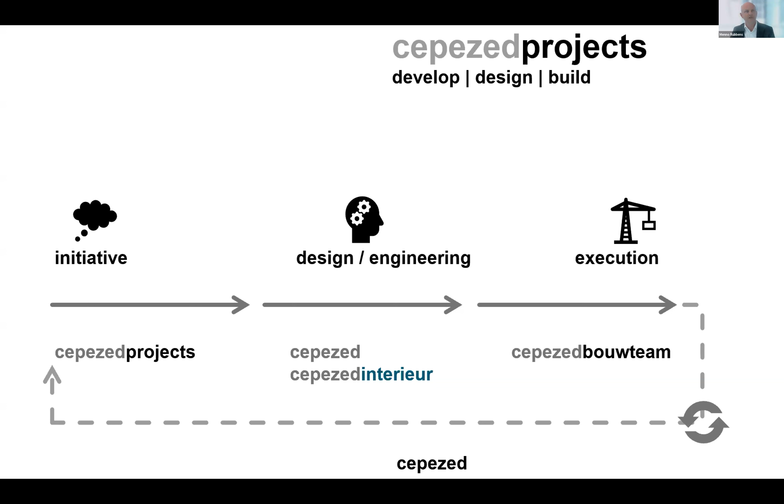cepezed projects is the development branch of the cepezed Group. cepezed Group is an ecosystem that brings together design, engineering, and execution under one roof. We work shoulder to shoulder with our sister disciplines, cepezed Architects, Interior, and the Building Management branch. Together, we form one integrated interdisciplinary team. And we like to say from idea to realization and beyond. Because we don't just deliver buildings, we deliver systems that perform, evolve, and endure.

But we don't stop there. We actively seek long-term partnerships across the chain, from demolition and material experts to contractors and system integrators. These aren't ad hoc collaborations, they're deliberate structural alliances, crafted to share knowledge, align incentives, and accelerate innovation. And why do we do that? It's because we believe this is the only way to deliver what we truly need today: smart, adaptive, and circular buildings. Let me show you what this looks like in practice with some of our projects.

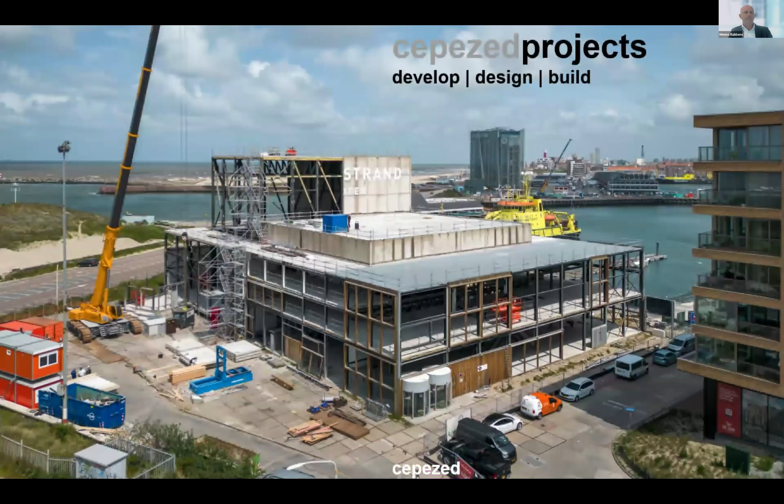We developed the temporary courthouse in Amsterdam, a fully demountable high-grade building. I'll come back to that a little bit later in more detail. We also created the greenhouse in Utrecht. It's a circular energy neutral restaurant designed to be completely disassembled and rebuilt elsewhere. And also we're redeveloping a theater in Oss. That's a city in the south of the Netherlands. And we use harvested materials that came from this theater in Scheveningen in The Hague to transform it into a vibrant, multifunctional complex, breathing new life into the existing components.

And we deliver modular laboratories and flexible office hubs tailored to ever evolving user needs. It's like Lego for grown-ups. In every case, we ask, how can this building serve today without limiting tomorrow? Because we don't just design for use, we design for reuse. And why does this matter? What is the urgency of it?

Well, let's talk about the elephant in the room, the CO2 emissions. The construction sector is responsible for nearly 40% of the global CO2 emissions. That includes everything, the extraction of raw materials, production of building components, transporting, logistics, construction activities, everything, and especially also the decades of operational energy use of the buildings. And that's a staggering figure, and it means that if we are serious about achieving the Paris Climate Agreement, we cannot delay. We must radically rethink how we build, and we must do it right now.

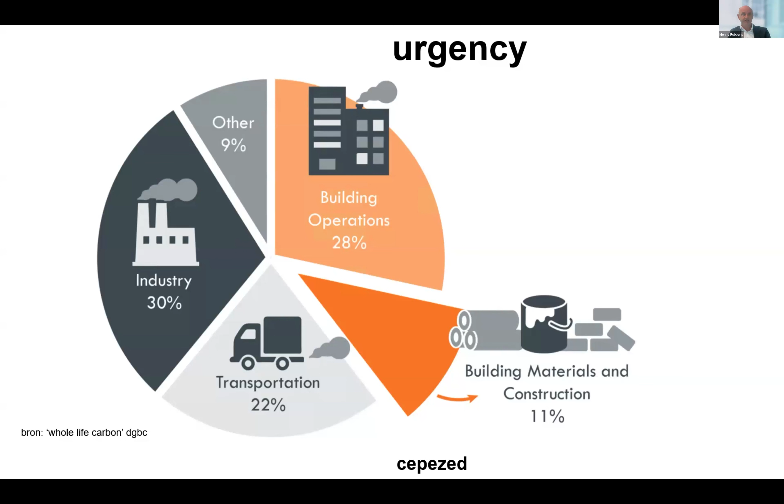Circular construction for us is not a niche. It's not an experiment. It's not a buzzword. It's an urgent necessity, and we're already doing it now. At cepezed, we're driven by two sources of inspiration. The first one is this definition of sustainability by the Brundtland Commission. It's meeting the needs of the present without compromising the ability of future generations to meet their own needs. And this sentence should be engraved in the minds of everyone who shapes the built environment.

The second inspiration comes from Stewart Brand, author of the book How Buildings Learn. You see the cover of it on your screen. And he offers a compelling critique of how some buildings are successful while other buildings fail. He has three key ideas that guide our thinking on a large scale. The first one is that all buildings are predictions, and all predictions tend to be wrong. This reminds us to embrace uncertainty and not fight the uncertainty. We can't predict the future as humans, so we must design for the change.

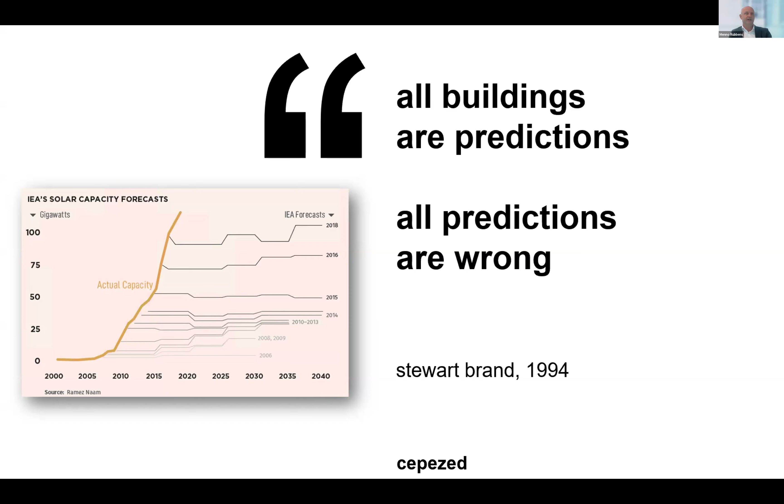And this graph of predicted versus actual installed solar panels shows you just how wrong even experts can be in their forecasts. So let's build structures that are flexible by design, not locked into rigid scenarios. And most buildings, he says, are also prematurely complex, which blocks adaptability.

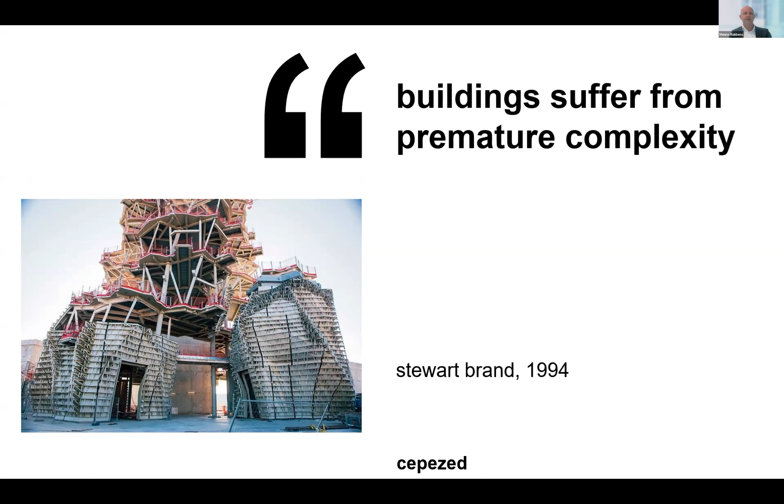We often should start with a simpler structure that enables complexity to emerge over time. And also, what he says is that buildings are made out of layers, and those layers have different lifespans. So mixing them up is a recipe for waste. Separating them makes change easy.

Think of it like a sandwich. If every layer of a sandwich is glued together, you cannot swap the lettuce without throwing the whole thing out. The same applies to facades, to interiors, to surfaces, to structures. Keep them distinct, keep them accessible.

And at cepezed projects, we've translated these insights into a concrete approach. We call it making buildings that are circular ready, a circular ready construction. We don't claim to have all the answers about the future circular economy, but that is exactly why we design our buildings to be ready for it. And the kit of parts thinking that we use is at the heart of this method.

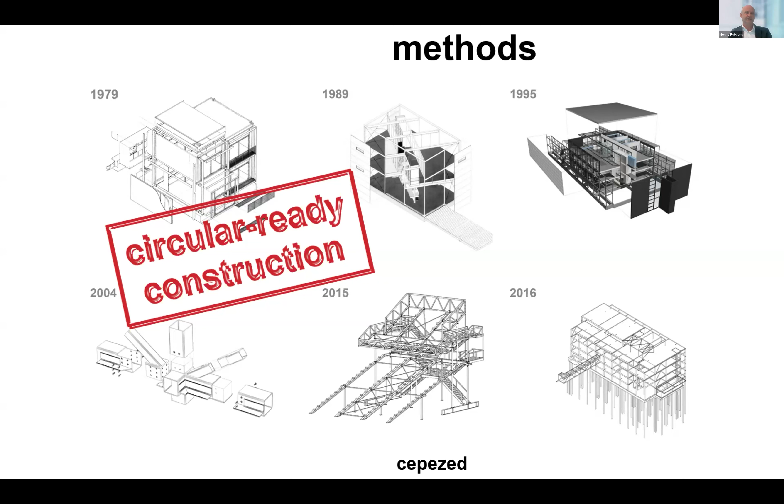Each building is assembled from standardized demountable components. That means they can be taken apart, can be moved, can be reused, can be reconfigured, and can even be completely reimagined and replaced and moved. The benefits are enormous. We can reduce the use of raw materials. We can cut down construction time, and most importantly, with this method, we eliminate waste, because in a circular economy, waste is a design failure.

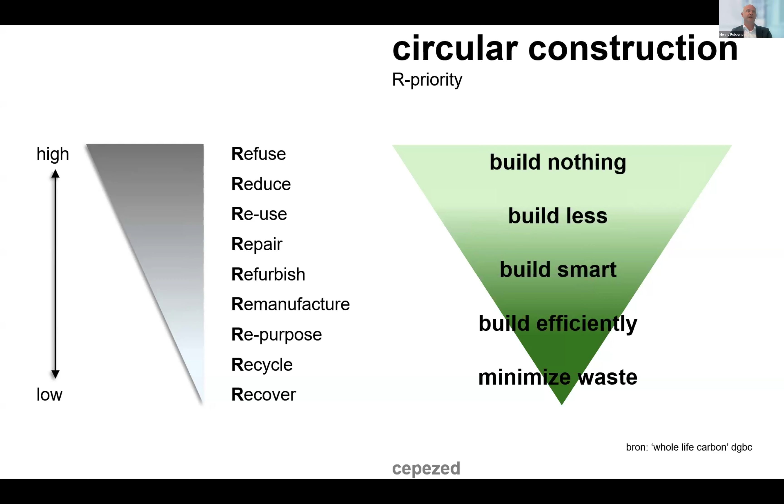Recycling is merely damage control, and burning material is a desperate last resort. So our goal is to make waste obsolete, and we aim for total reuse, not just in materials, but also in function and in form. Let me take you back to the temporary courthouse that I talked about earlier in Amsterdam. This was not a shipping container or a pop-up shed. It was a fully functional, high-quality building used for 7 years by the judiciary.

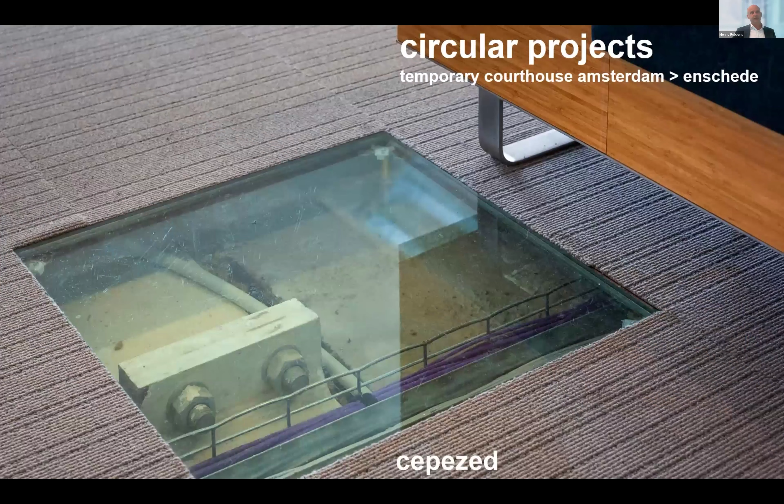And from day one, we designed it with the future use in mind. Can it later be an office? Can it be a school? Can it be apartments? All those functions should be possible in our view. The structure that we designed was modular. The services that are integrated are separable, and all the components were cataloged in the BIM model.

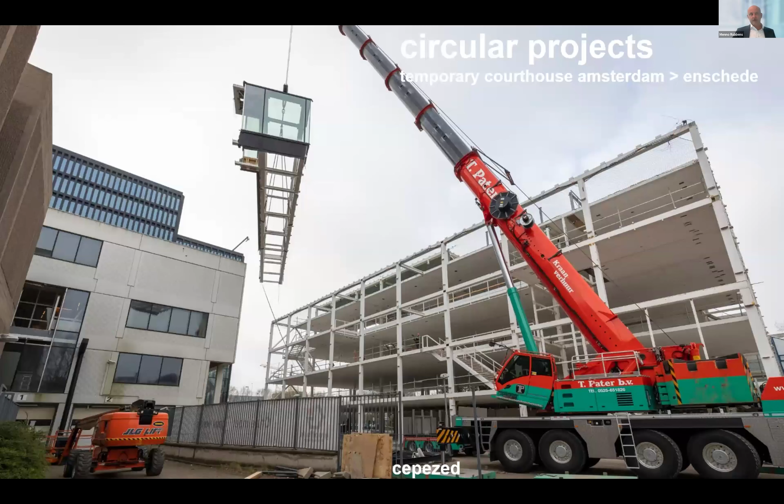And when the building was no longer needed on that site, what did we do? Well, we took it down piece by piece with care, with precision. And here's the best part: 90% of the building's CO2 footprint, embodied carbon, was directly reused on the new site. So there's no offset, there's nothing recycled, it's all reused. And here you see the materials on the new location.

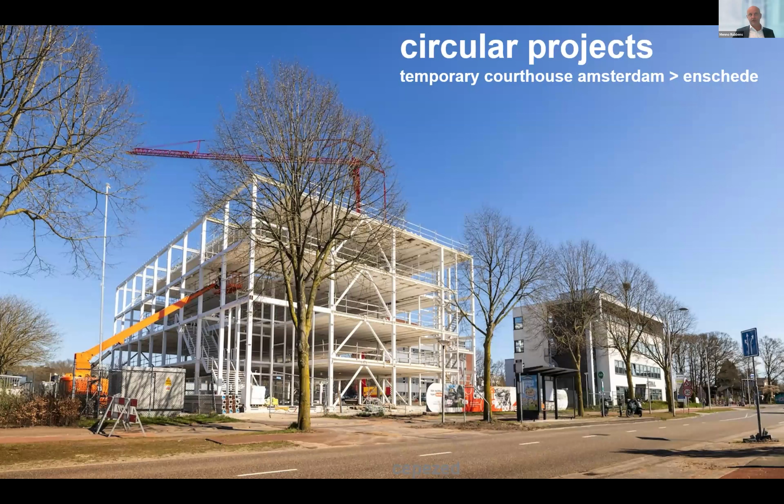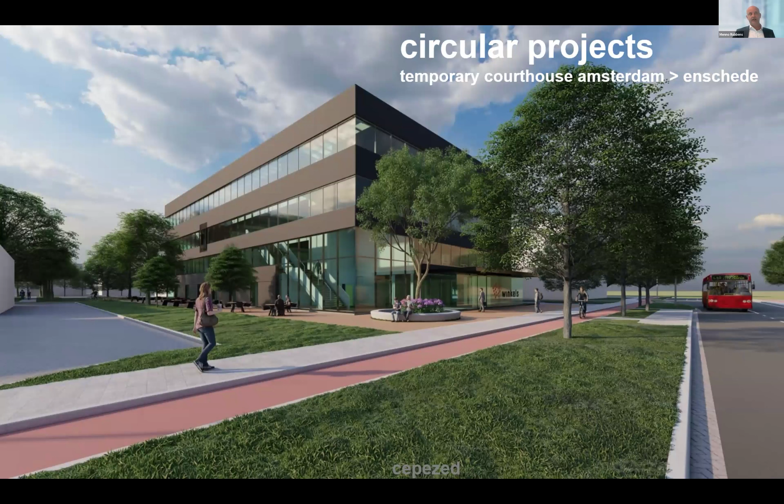And today that same building is being reassembled as a hybrid office and an educational center. The same parts, but on a new location and with a new life and without any waste. And this is proof that this approach works. It's scalable, it's repeatable, it's commercially viable, and it's already happening. And let me leave you with a few key messages.

The construction sector holds a massive lever in the climate transition, and we are part of the problem, but we can also be a very big part of the solution. At cepezed Projects, we use that lever to build a circular and adaptive future, project by project. And our kit of parts methods turns uncertainty into opportunities.

And we work in deep collaboration across the chain to bring this vision to life, together with contractors and demolition companies. And we're showing, not just telling, that a different way of building is not only possible, but it's preferable and it's commercially viable. The future is circular, if we choose to build it that way. And at cepezed Projects, that's a choice we have already made.

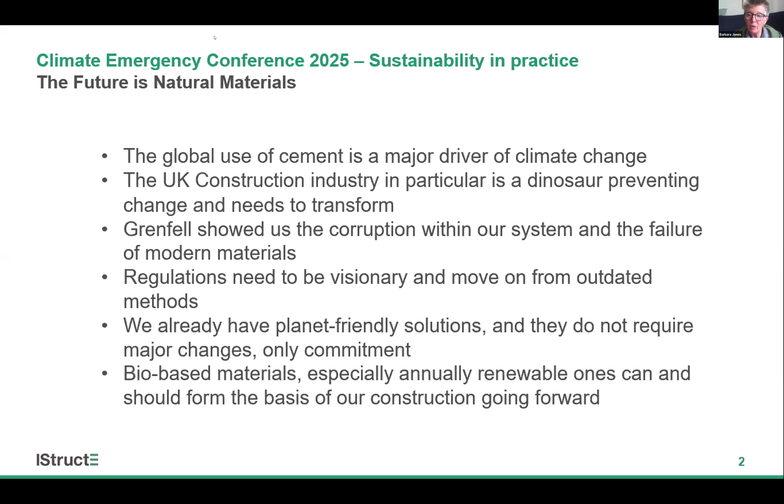We already have planet-friendly solutions and they do not require major changes, only commitment. And bio-based materials, especially annually renewable ones like straw and hemp, can and should form the basis of our construction going forward. So this is my premise for today. So to start with the past, we can learn a lot from the past. We don't have to always replicate it, but we can adapt what works.

And here we've got a very simple foundation with stone sitting on top of the earth. So no trenches, no need for cement, something that has lasted over 100 years already. We've also got something that at first sight might look like a failure, but actually, because it was made with lime and stone instead of cement and stone, it has lasted the test of time and it has actually become a tourist attraction.

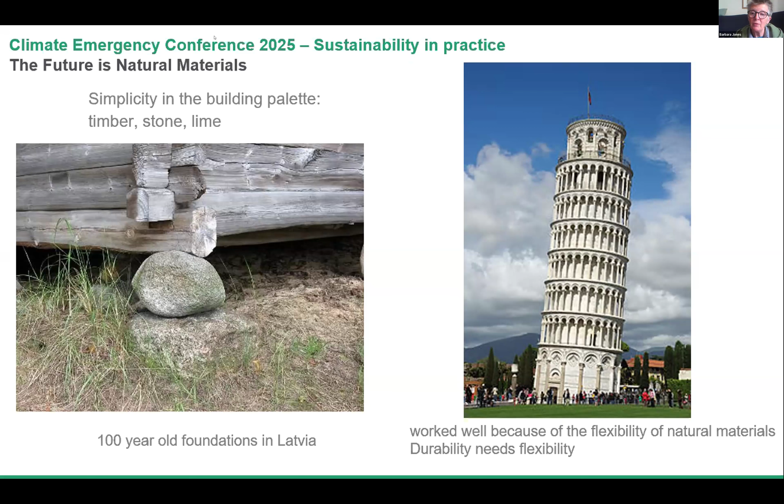So old buildings give us ideas for modern buildings. The ideas can be very simple, but that doesn't mean that there's something wrong with them. They could still work in the 21st century, and they can still work even if the ground conditions have not been fully understood, as in the right-hand case.

There are plenty of examples of cement-free designs available. I've specialised in them in my career of 45 years in construction, and a lot of these designs are freely available for you to copy and adapt for your own use. And a great way of combining natural materials with recycled materials is to make cement-free foundations using pillars of car tyres, which can be built very cost effectively.

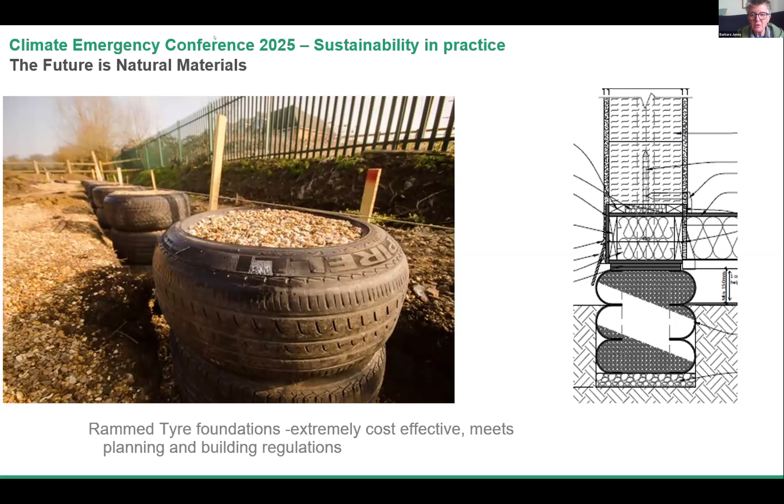And these have been passed by planners and by building regulations, so they've got full approval in the UK, and that has been in existence since 1996 when the first ones were passed. Another way of building foundations, well, this is the same way, using car tyre foundations. I want you to see that we're talking about real buildings.

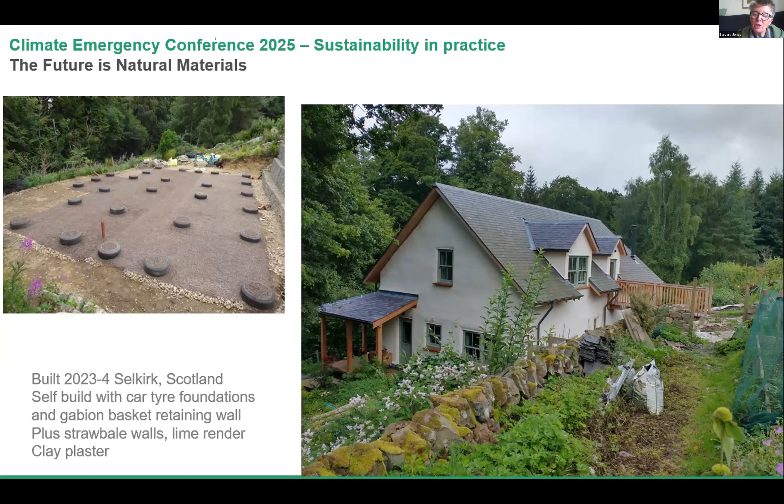On the other side of the scale, thinking about what Mano was talking about, here we have modular panels made in a factory, these ones in Slovakia or Lithuania. A factory will be coming to the UK shortly. And these are EcoCocon straw panels. They are 400 mil deep and they have a U value of 0.123 when they're fully fitted. They're a passive house certified system.

They're extremely simple to put together, so simple, in fact, that lots of self-builders are using them in the UK. And they're also very cost effective, because if they weren't, self-builders wouldn't be doing it. And they're more affordable than other SIP systems that are available, because they only have 4 layers, and because they're made of renewable materials. There is no other system that is as sustainable as straw.

88% of these panels is made of straw, and that can be grown each year without changing any agricultural practice, because in the UK we have 5 million tonnes of straw surplus to requirements every year. We can build everything we want and more with that amount of straw.

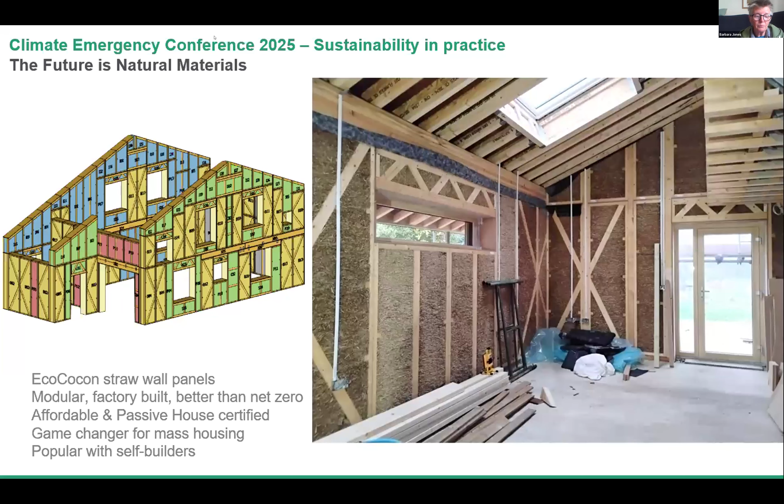In Sweden, where they have a different way of understanding fire risk, they have built the Hyllie project, which is a 12-storey apartment block using EcoCocon straw panels for the external walls, and the structure is held by CLT panels in the middle with a concrete staircase. And you can see from the costs here that it saves an awful lot of money compared to other building types. We're not able to go this high in the UK. We can only go to 18 metres because of the lack of understanding about how these materials work in practice at the moment.

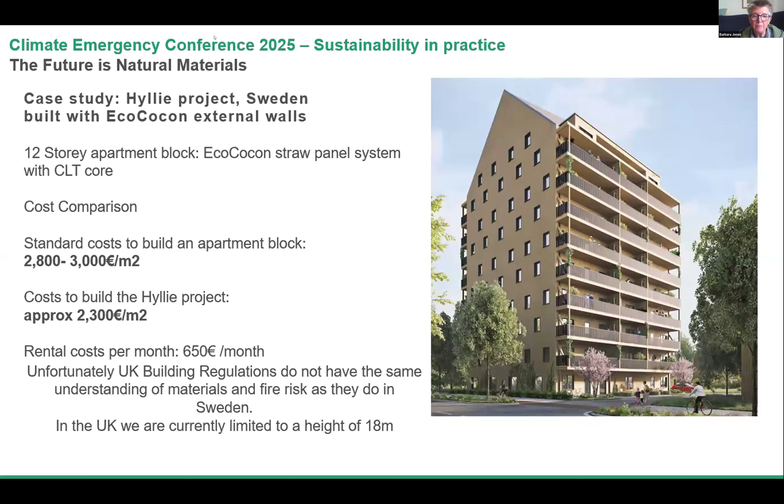Here we've just got a couple of examples of the EcoCocon straw house finished. Both of these are self-builds. They both meet all the regulations in England and in Scotland and Wales. And the right-hand one also has foundations with no cement in. This is what the foundation is like for the right-hand house.

It's actually a foamed glass geocell, chunks of hardcore, if you like, which has different purposes. So it acts as a hardcore, it acts as an insulation, and it acts as a capillary break, which is the old-fashioned way of preventing moisture movement upwards through a building. And it's based on the ideas of road building.

So when I first designed a building with this type of foundation, my ordinary engineer wasn't able to do it, and I had to transfer to an engineer who knew about road building. But to be quite honest, the road building ideas also go back to where we were at the beginning of this slideshow, which is they were following ideas that the Romans had put forward for taking roadways across marshes and ground with no good bearing on it. And so a lot of the ideas that I use are adaptations of the past.

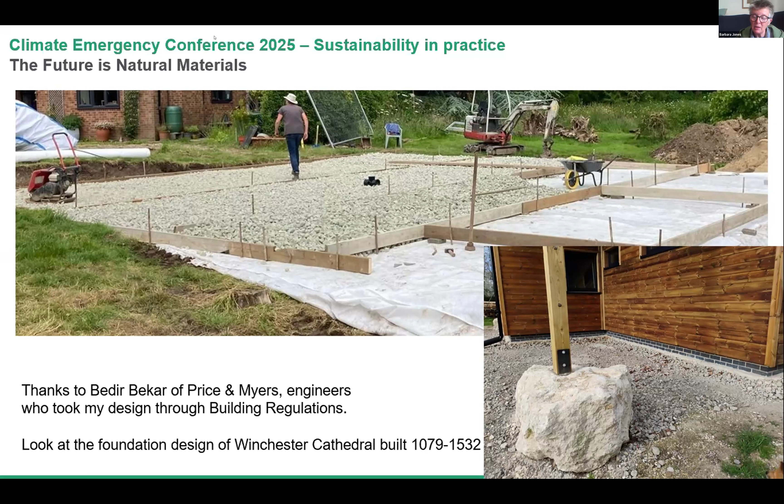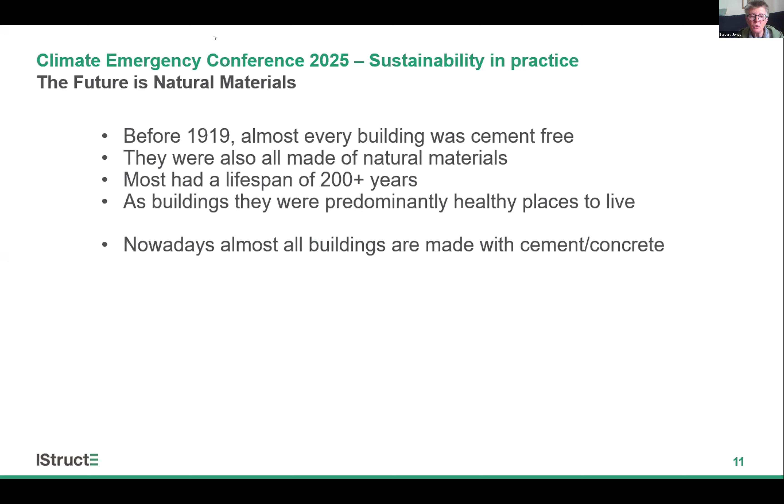So before 1919, almost every building was cement-free. They were also all made of natural materials. Most had a lifespan of 200 plus years, and as buildings, they were predominantly healthy places to live. Nowadays, almost all buildings are made with cement and concrete. They all contain toxic materials like PIR insulation and squirty stuff in tubes. Indoor air is full of pollutants from various different things.

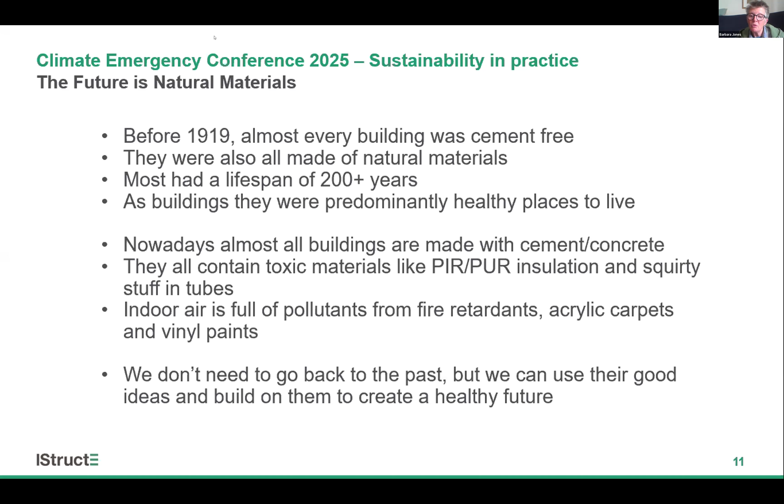We don't need to go back to the past, but we can use their good ideas and build on them to create a healthy future. And just by way of illustration of that, we've got the Sydney Opera House, a beautiful, iconic concrete building with a projected lifespan of 250 years.

We've also got the Pantheon in Rome, which is already over 2,000 years old. It's been neglected for huge amounts of time, and it potentially has thousands more years of life left, and it's built with stone and lime. It's something we really need to be thinking about if we're going to go forward.

So I'd reiterate what David said at the beginning. Don't be afraid to speak up and offer other material choices and design solutions throughout every building that you're working on. Thank you very much.

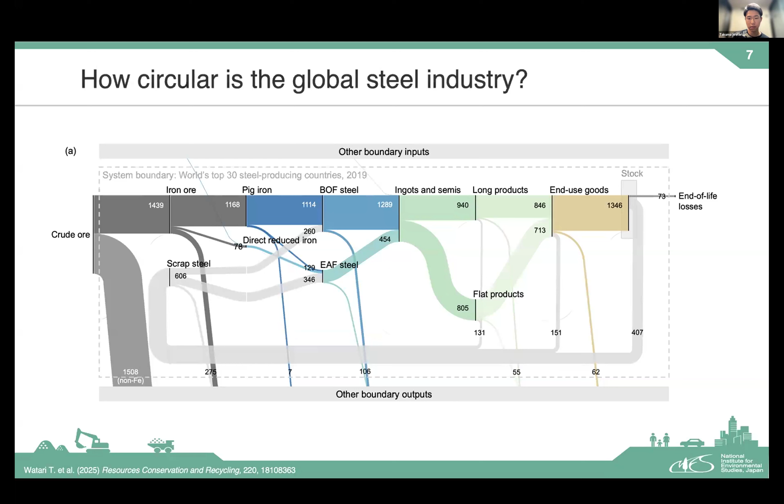So what we see in this diagram is the current global steel flows. So from the left, we have the iron ore extraction, which then moves through the stages of iron making, steel making, forming, fabrication, in-use stock, and waste management and recycling. So at the moment, the global steel industry requires about 1,800 megatons of iron input for steel making, and about 600 megatons of that comes from recycling. So this means the global recycled content in the steel making stage is about 33%.

So despite steel's inherent recyclability, since steel is magnetic and relatively easy to separate from the waste stream, and also the decades of industry's efforts, only 1/3 of the iron inputs currently come from recycling.

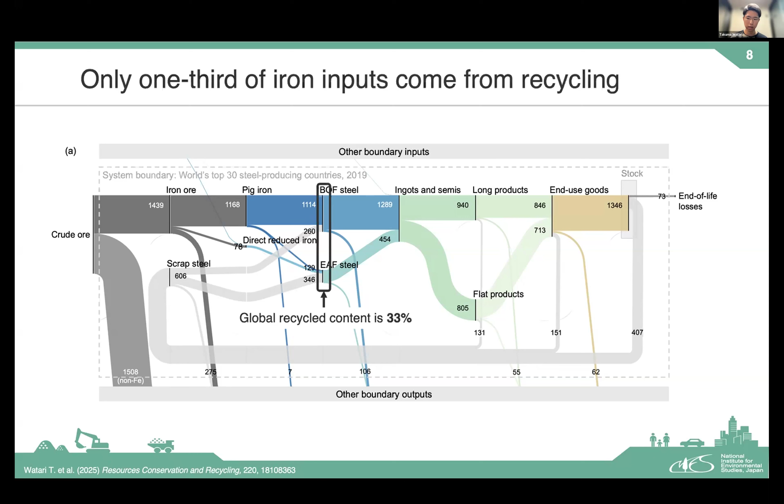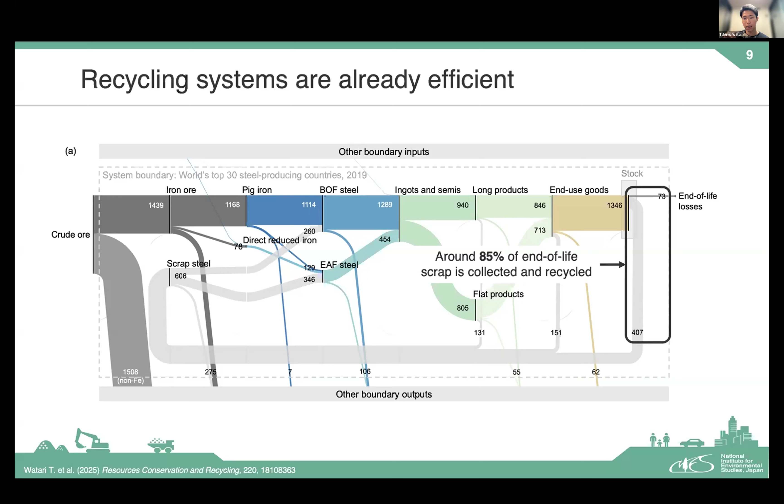And the important point here is that the limited recycled content is not because of poor waste management. In fact, what we can see on the right side of the figure is that more than 80% of end-of-life scrap is currently collected and recycled.

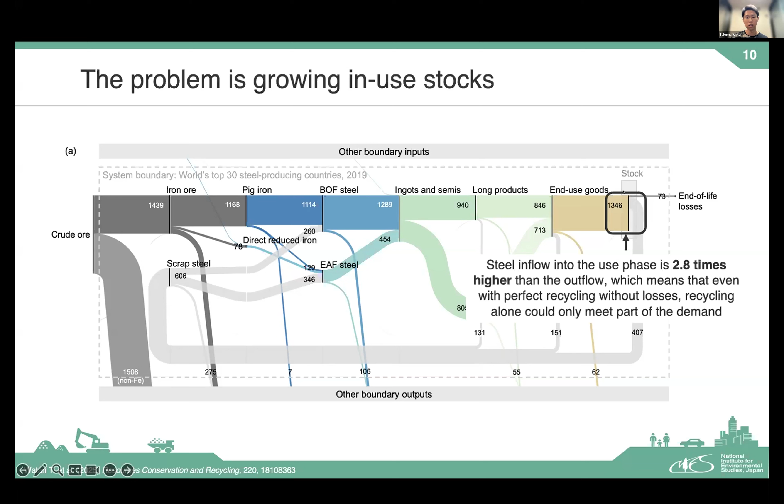But the real challenge is the growing in-use steel stock, which is still embodied in products, buildings, and infrastructure. So what we see on the right side of the figure is that steel inflow into the use phase is about 3 times higher than the outflow, which means even with perfect recycling, without any process losses, recycling alone could only meet part of the demand globally.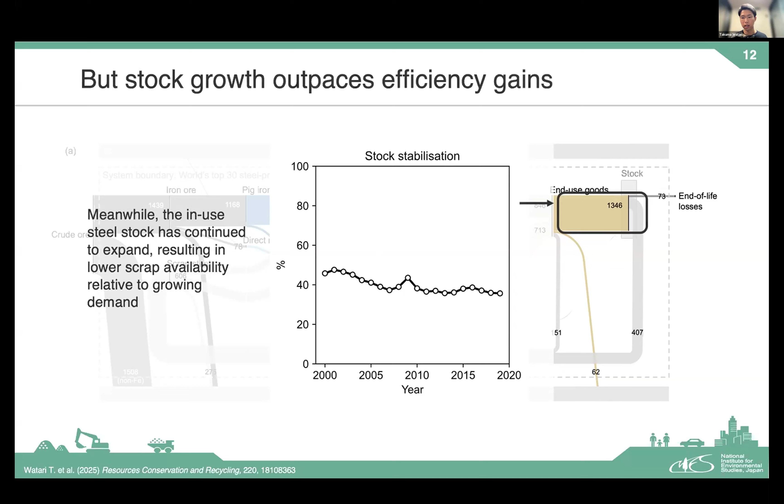And this sort of imbalance between inflows and outflow is not a short-term phenomenon, but actually part of a long-term trend. So what we see in this diagram is that over the past 2 decades, the global steel industry has made significant efforts to recycle more and more scrap, and the end-of-life recycling rate has improved from about 60% to more than 80%. But at the same time, the in-use steel stock has continued to expand, which means scrap availability relative to demand has been declining over the past 2 decades, from the year 2000 until 2020, as you can see here.

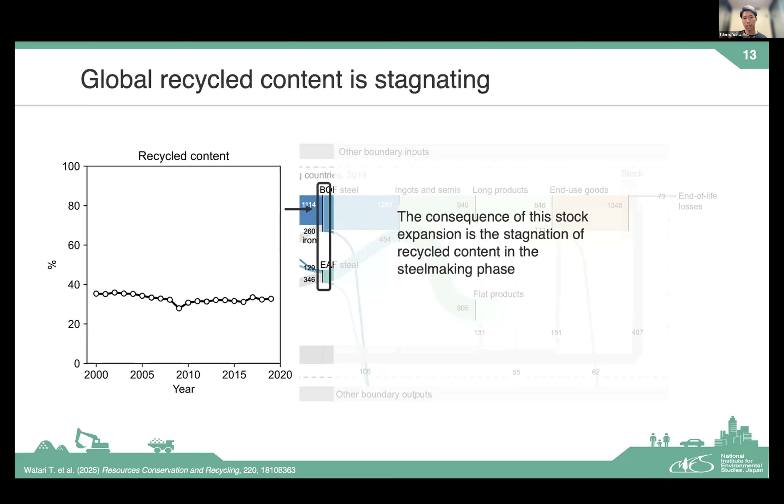And the consequence of this stock expansion is the stagnation of recycled content in the steelmaking stage. So what we see in this diagram is that the global recycled content in the steelmaking stage has stagnated at about 30% over the past 2 decades. So in that sense, the industry hasn't been able to close the loop because the in-use steel stock has been growing much, much faster than the improvement in the waste management stage or recycling efficiency.

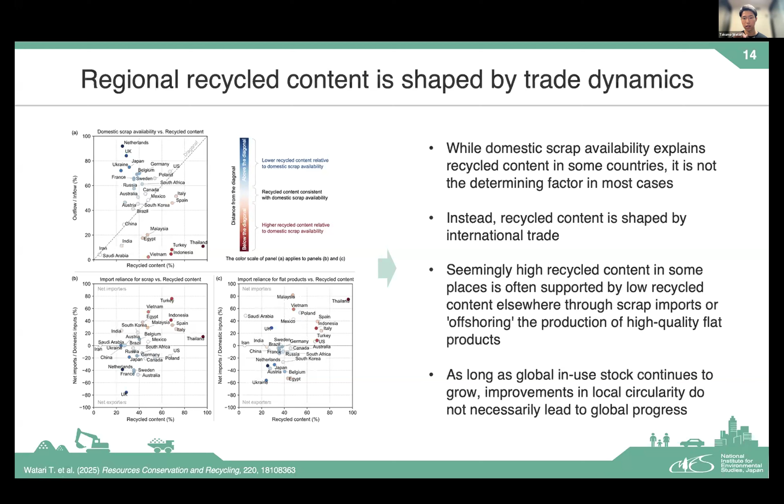And so seemingly high recycled content in some places is often supported by low recycled content elsewhere through scrap imports or offshoring the production of high quality flat products. So we conclude in the study that as long as the global in-use steel stock continues to grow, more recycling in some places does not necessarily lead to global progress. So clearly, recycling won't save us unless we stabilize the growth of in-use material stock. So that should be the priority. So that's my first argument.

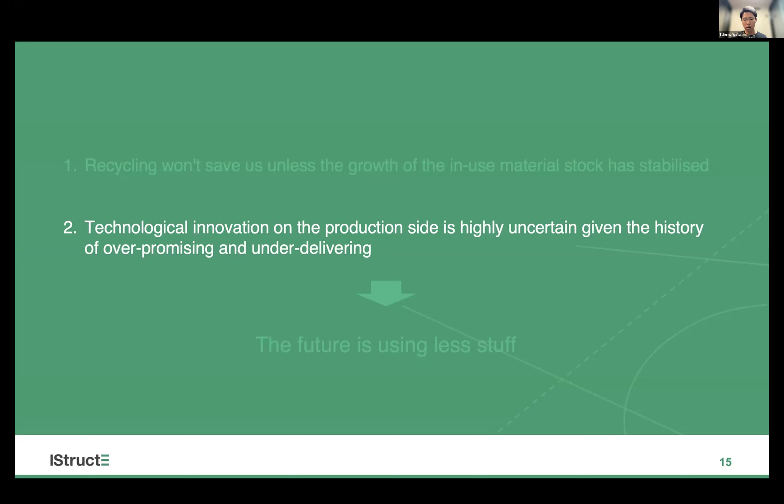Now I want to move on to the second part of my argument, because many are placing their hopes on technological innovation on the production side, such as carbon capture and storage or hydrogen. But the key question is whether these technologies can scale up fast enough. And unfortunately, our study indicates this is highly uncertain or highly unlikely. So let's look at cement as an example.

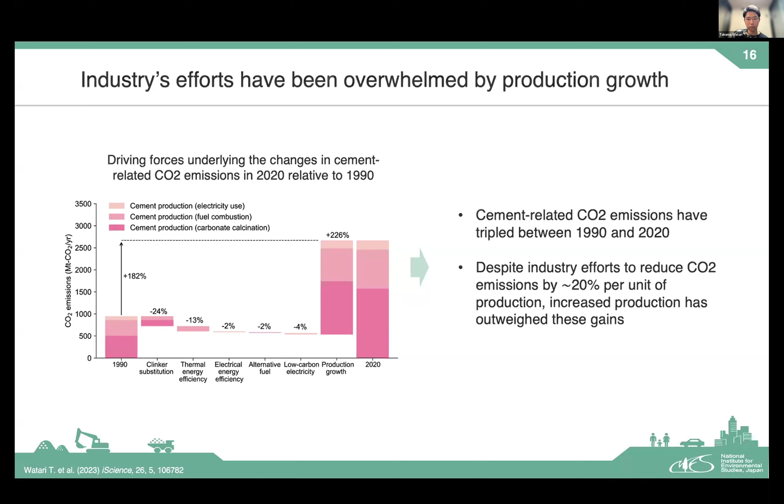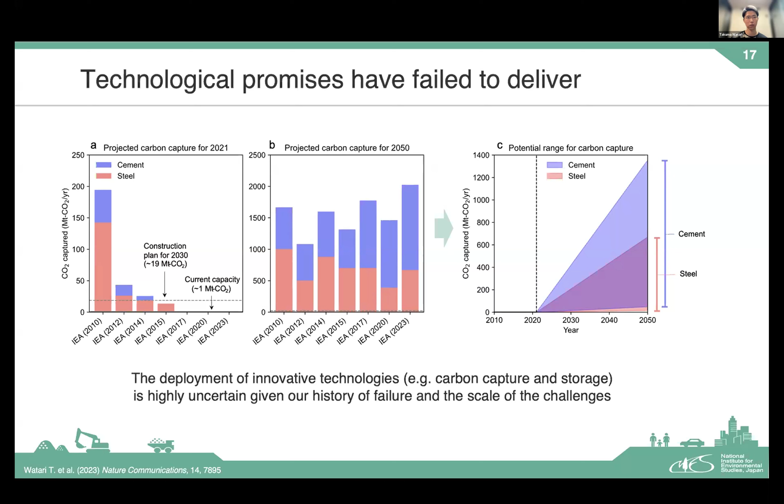And yet, if we look at the 2050 projections, we see the International Energy Agency almost constantly assumes about 2,000 megatons of CO2 will be captured in these sectors. And that would be a remarkable achievement if we could get there within 25 years. But given the scale of challenges and also our history of failure, the actual deployment is quite uncertain, if not highly unlikely. So based on all these data, we estimated how much material we could possibly produce within the finite global carbon budget.

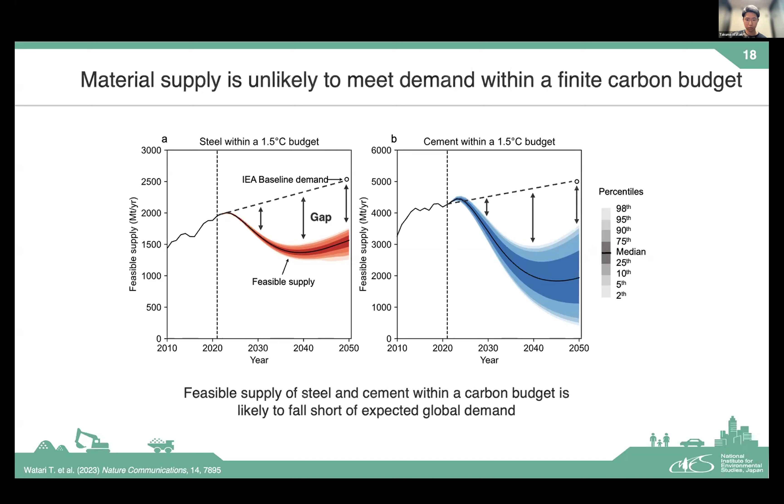So to summarize, recycling won't save us unless we stabilize the growth of in-use material stock, and technological innovation on the production side is highly uncertain given the history of overpromising and underdelivering. So the logical conclusion to me is we need to use less materials in construction.

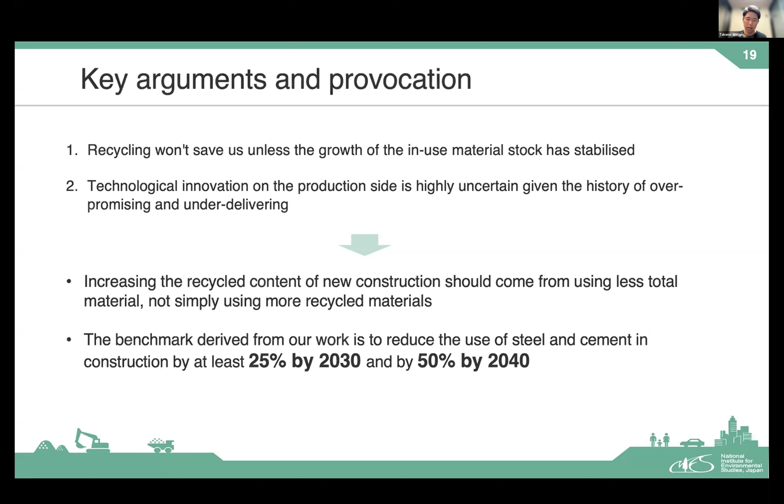I think many of you in this room have far more expertise than I do in this space, but I think what I can offer from a systems science or systems analysis perspective is that the benchmark we need to achieve is something like reducing the use of steel and cement in construction by at least 25% by 2030 and by 50% by 2040. So these are the minimum requirements that we as citizens in the global north must achieve in order to stay within the fair share of the global carbon budget based on our study.

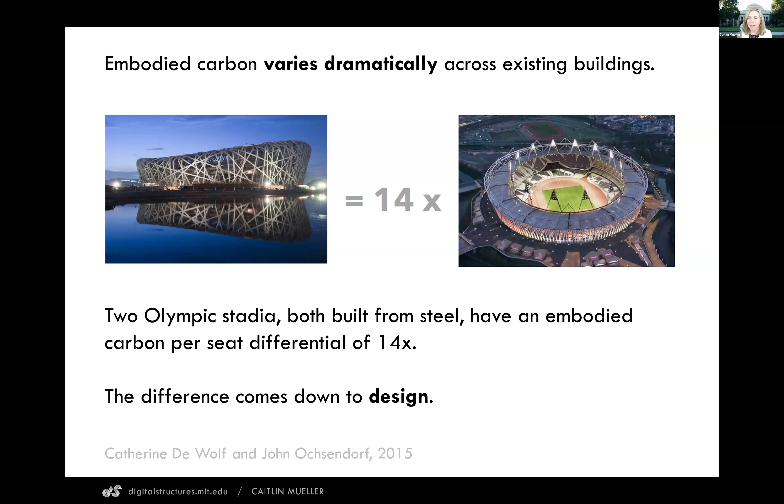They're both made of the same material. They're both made out of steel. So it's not just a question of material substitution here. Why is the embodied carbon so different? It really comes down to design.

And as we've collected more data about embodied carbon from practice around the world, this is recent data from the United States from the Carbon Leadership Forum, we continue to see this remarkable spread in embodied carbon. Here we're looking at several hundred buildings normalized by square meter across 3 different material systems. Again, we see a huge differential here of more than 8x. And it can't be explained by material alone. Again, my argument is this comes down to a question of design.

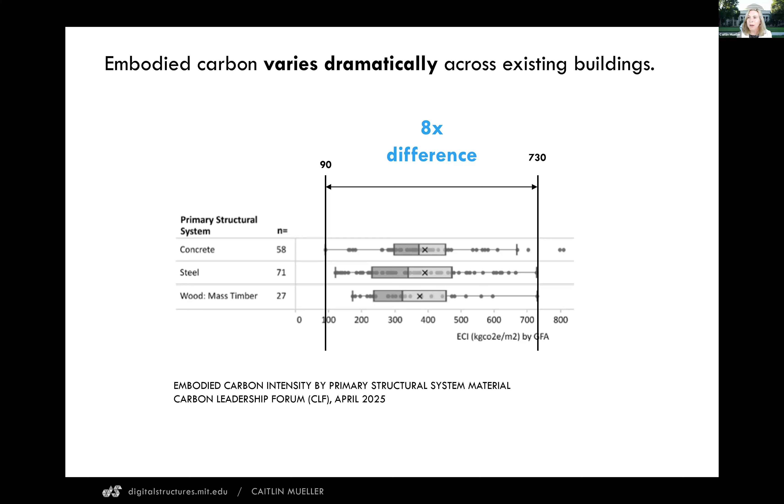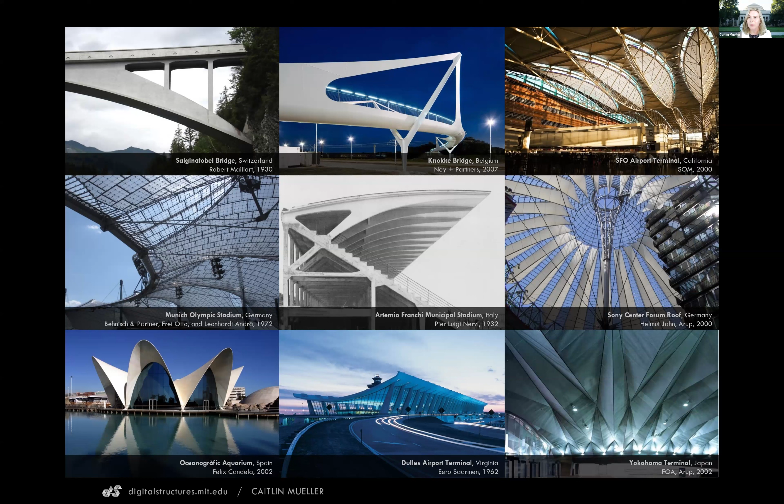We know this conceptually. The best structures from around the world and from throughout history use design explicitly to achieve remarkable forms, but also remarkable efficiency, lightweightness, use of material that is intelligent and driven by design. These structures are remarkable, but unfortunately, they're also fairly rare. We need to think more about how high performance design, which has so many benefits, can play a role not only in the construction of remarkable cultural and elite buildings, but throughout the architecture, engineering, and construction industry.

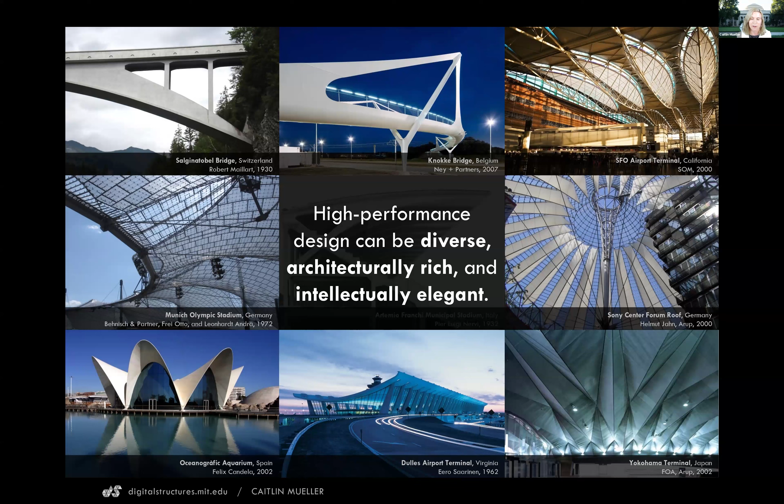In my work and in my research at MIT, we're promoting a way to do this through digital design, through using computation to allow us to flexibly and creatively and systematically explore large design spaces of possible solutions so that we can find potentially optimal solutions, but also balance performance with other really important goals driven by human expertise and ingenuity and creativity. We find when we model buildings at the full scale, we can start to find dramatic carbon reductions that, again, are not possible through material substitution alone.

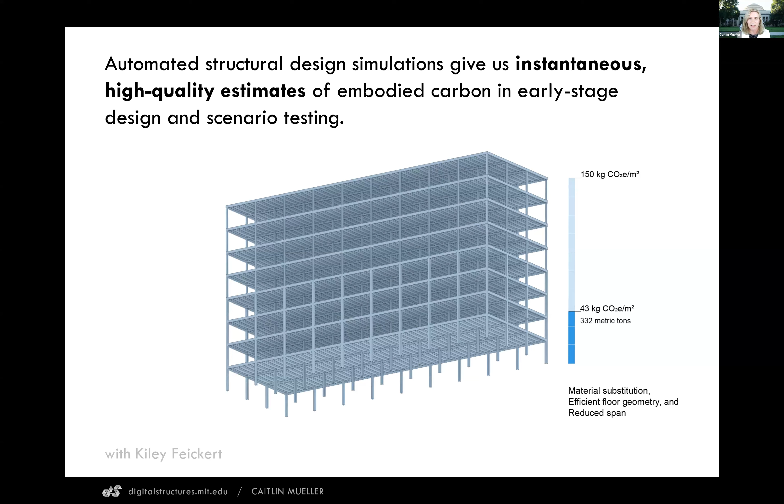We see that material substitution has a modest savings in terms of overall carbon intensity, but larger scale decisions like reducing the span of the columns, introducing smarter shaping of structural elements, reusing components, using all of these ideas together produces not only one solution, but many different high quality ways to reduce carbon that promotes innovation and creativity and allows us to find solutions within our local context. So I'm really inspired by seeing all of you doing this today. And I think this is absolutely the mentality that we need to take forward.

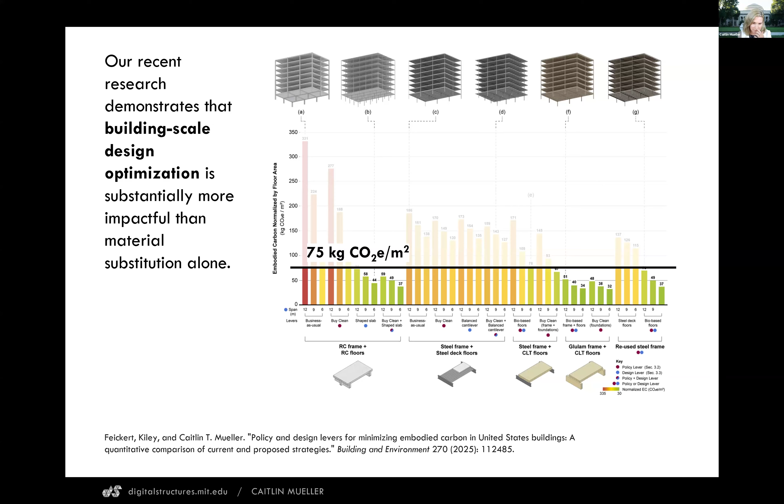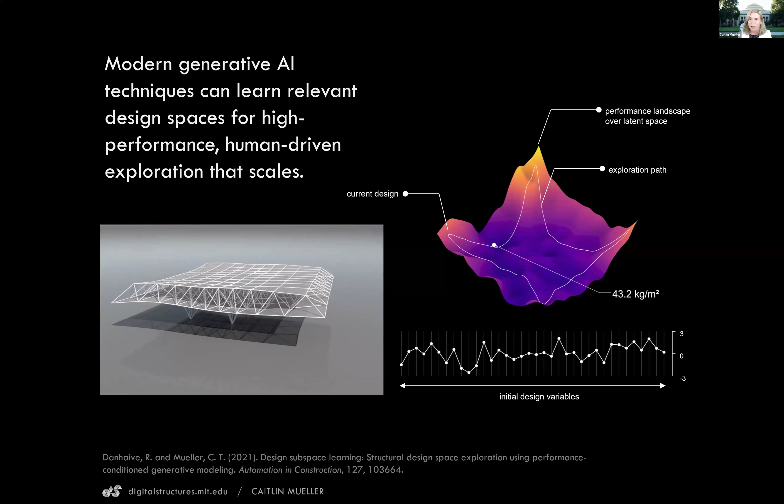How can computation help us do this further? I'll give a few examples of emerging tools and approaches that we're developing in our research and also some recent prototypes and projects. One way that we're thinking about how we can expand design space exploration is using generative AI to learn new design spaces. Really complex spaces of buildings that have hundreds or thousands of variables are practically impossible to explore with existing optimization tools. The problem space is just too big. But modern generative AI tools like this can learn a new latent space of high performance possibilities that start to make sense of really large scale data to help us discover new ideas.

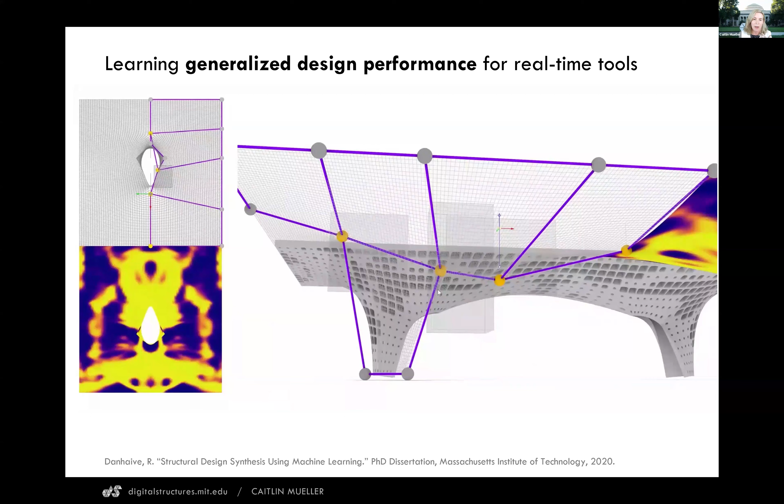So if I change the shape of the geometry, I can instantaneously see how a material should be optimally distributed, which changes these engineering techniques from things that can only be done once or twice to things that can happen in rapid, iterative, creative workflows that are collaboratively pursued by architects and engineers together.

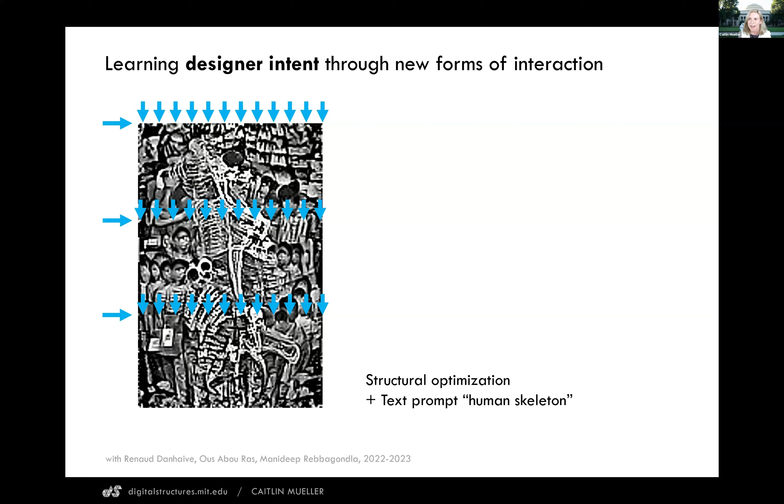We can also start looking at how new AI tools can collaborate or be compatible with engineering techniques like topology optimization. This is kind of a funny example, but here we're using a text prompt for a human skeleton combined with a topology optimization technique to find a sort of new form of skeleton for a building. And this is not necessarily immediately buildable.

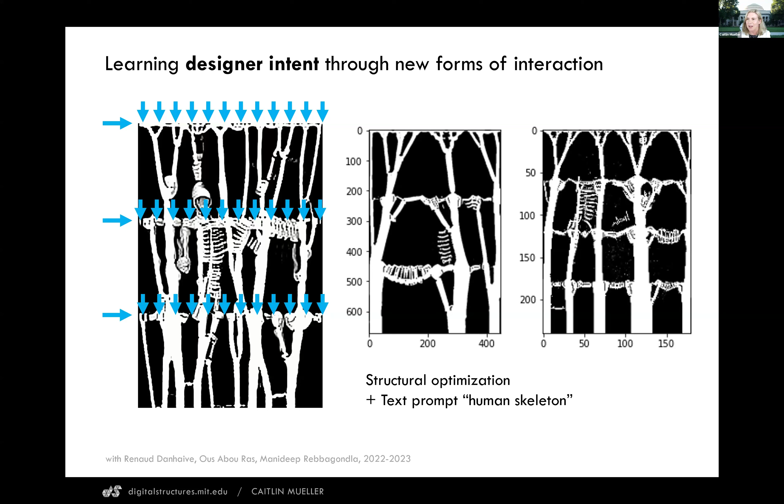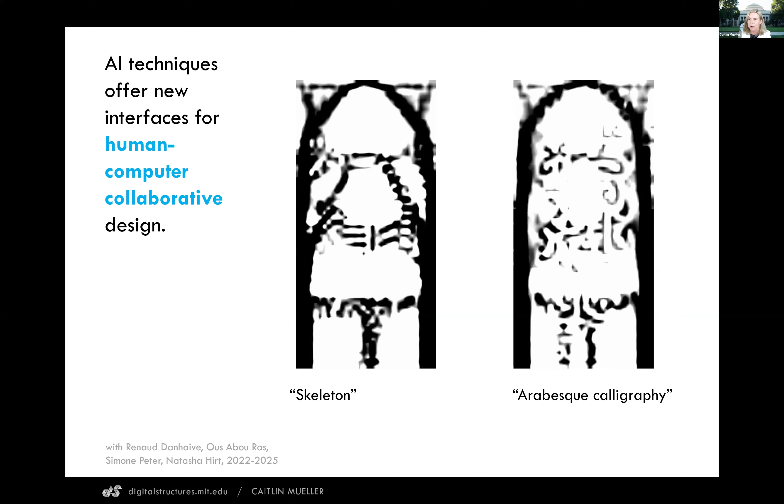There's some issues that come out in the results, but to us, it's this really interesting set of experiments that start to show how we can combine human intent, creativity, design impulses with performance-driven design to arrive at new types of solutions that start to connect poetic influences with rational form making.

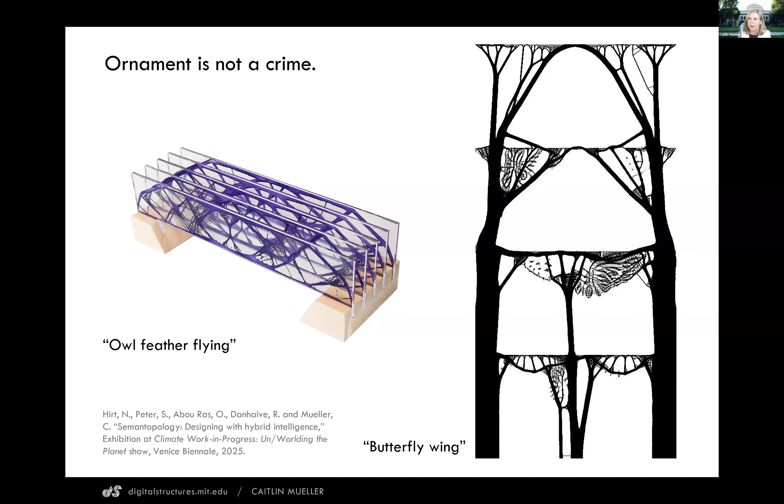It's interesting to look at some of these examples that start to look really naturalistic, and it starts to remind us that actually the natural world also offers a lot of opportunities for us directly to reduce carbon in structures. And indeed, people working with wood and trees have been doing this for centuries. For example, in historic shipbuilding, trees were used in a minimally processed way to find high performance structural pieces that meet the geometry of the trees where they are to find the shapes of the boats.

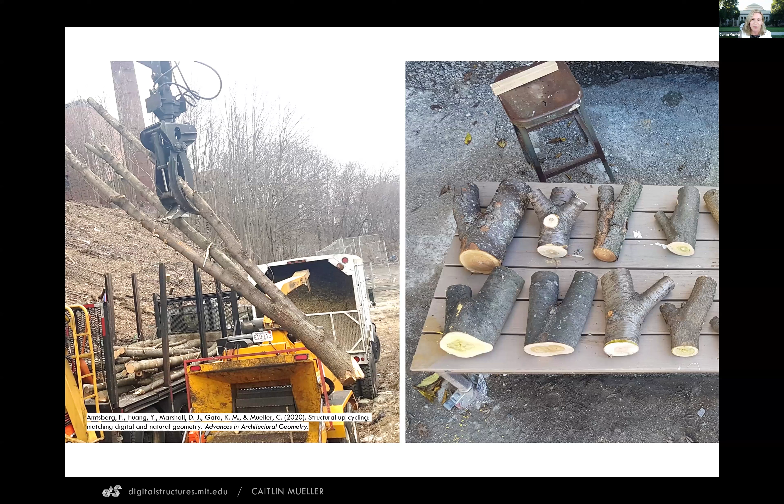We've been exploring a similar idea in our research where we're saving trees from being chipped and having all of their carbon released and identifying their joints as potential structural connections. We can use digital workflows that allow us to digitize this inventory of tree forks as structural connections and find design possibilities that make the best use of these materials.

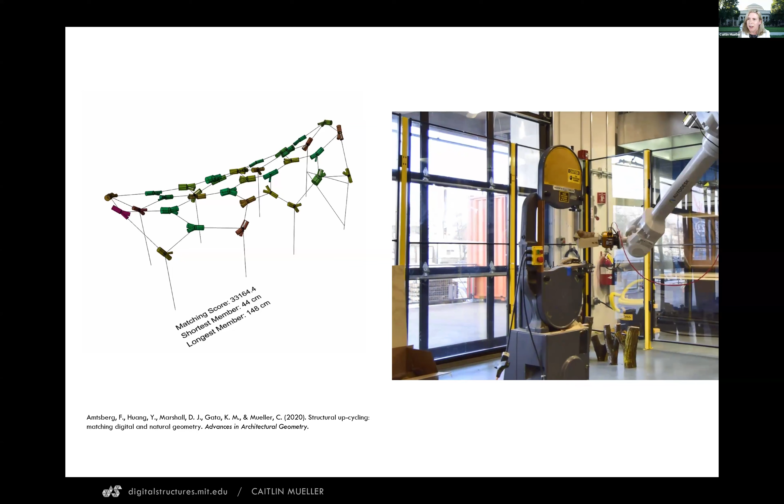So how should I change the design of this grid shell to better use the tree forks that I have available? And how can automation like robotic bark removal make this scalable so that even though each branch is unique, the toolpath automation happens in an automatic way, and so it's highly repetitive.

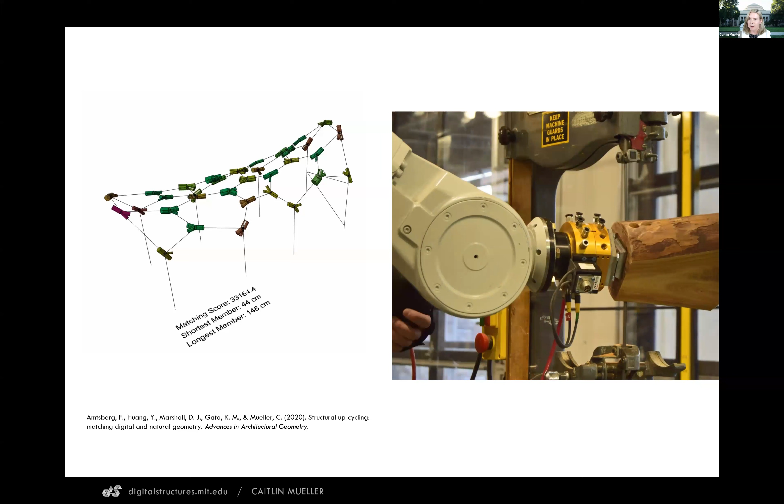We can also do this without robots. We can use emerging tools like augmented reality to use really traditional carpentry joinery techniques like scarf joints, but cut all the pieces informed with our digital tools.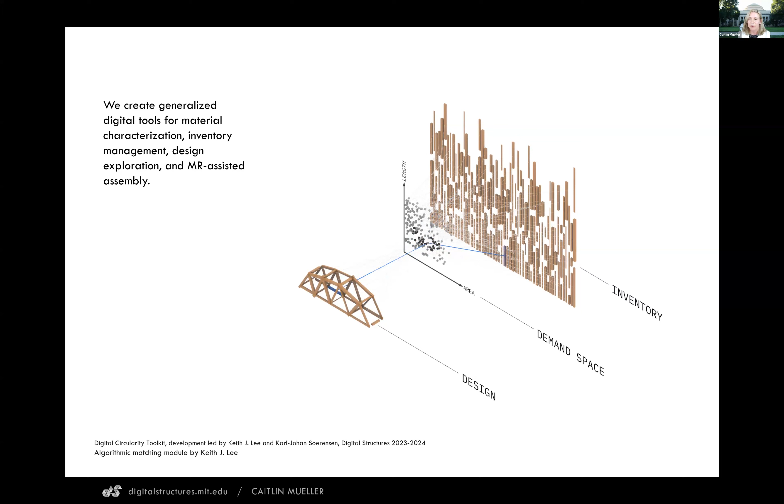This circularity idea is more general than just trees. We've had a kind of very general approach where we understand supply and demand in structural form making, where we can design structures to respond to an inventory of many different types of parts, of linear elements, of rubble, of offcuts. Here we're looking at how we could design a truss in response to an inventory with optimal matching that happens in real time thanks to really fast underlying algorithms.

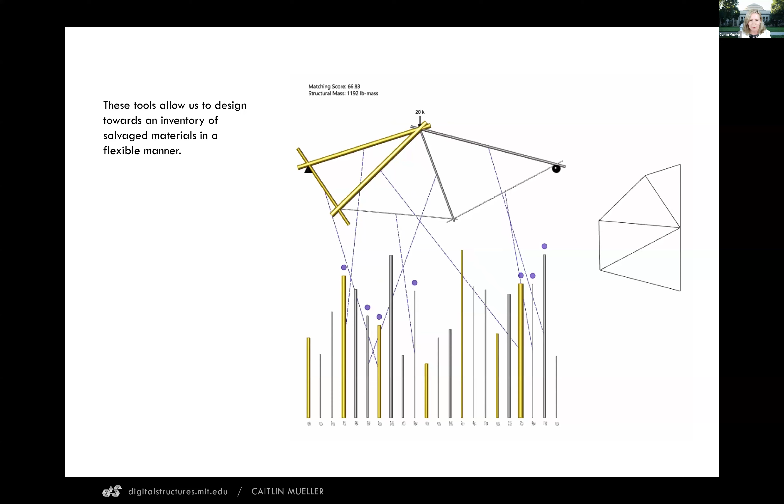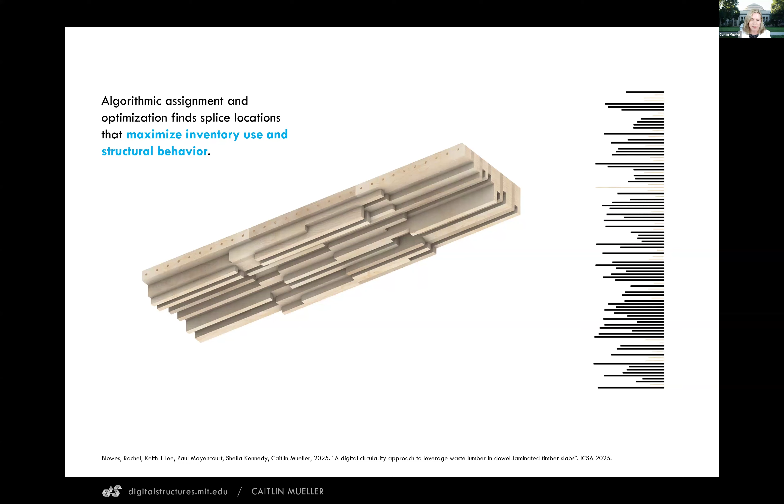We're applying these techniques to ideas like how can we use scraps of dimensional lumber to produce high performance structural components like dowel laminated timber floor slabs, which can automatically make use of a scanned inventory of scrap and use dowels to successfully load transfer if these scraps are organized in the right way to produce new shapes for buildings.

And finally, I also want to talk about concrete, as this came up quite a lot today. Concrete's a really important material in our history and likely also in our future, but we need to start using it in a dramatically different way. Of course, we need to use alternatives to cement, but we also just need to use a lot less of it. The great news about concrete, as I suggested earlier, it's very possible to do this.

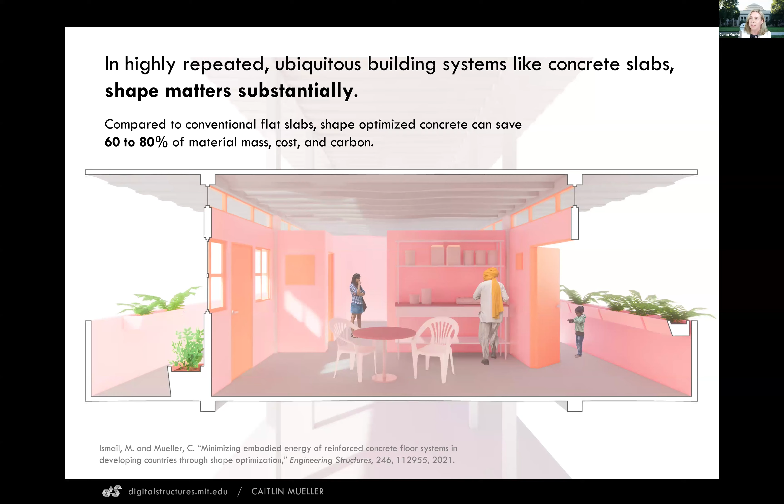Concrete is one of the easiest materials for us to sculpt and remove unnecessary material because it's cast, and it benefits tremendously from that process because it is so heavy. And so our process that we've developed uses shape optimization to find optimal configurations for ribbed structural systems that follow building codes that are based on today's knowledge, that use today's materials, but that can reduce carbon by 60 to 80%.

We're working on disseminating this in high impact applications like affordable housing in the global south. Here's a prototype that we built in Mexico with partners. My students who worked on this are commercializing this technology, this shape optimization technology, with a new startup called Forma.

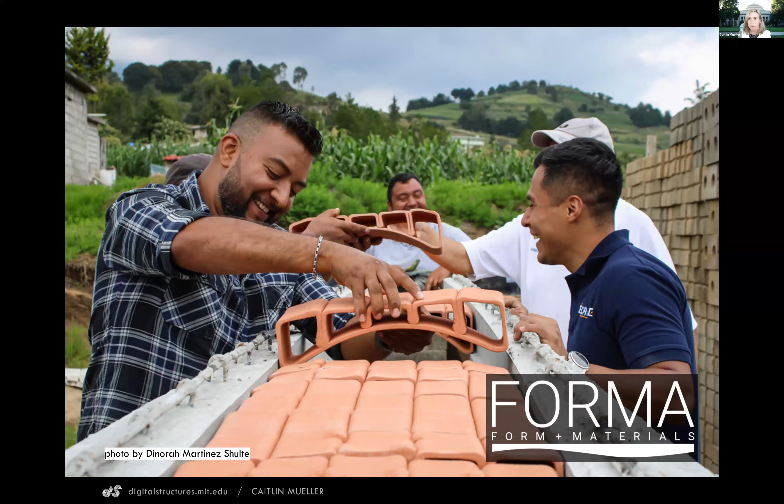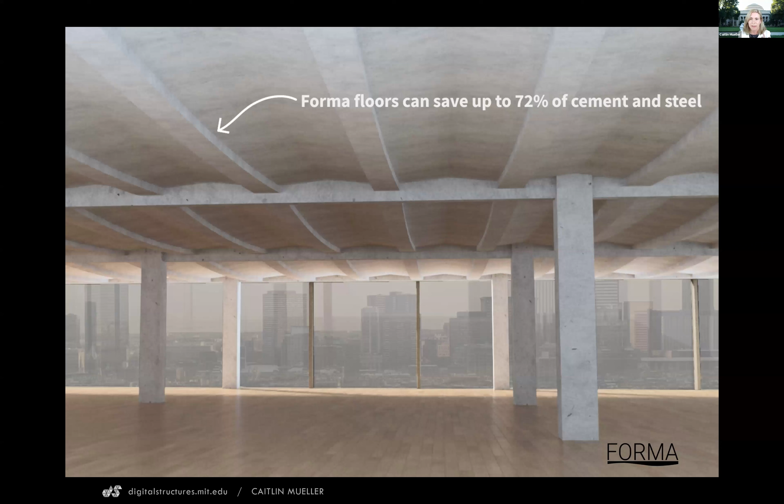They also use techniques like additive manufacturing of very low cost formwork to de-risk scaling up these new precast concrete techniques. And they're demonstrating the potential of reducing the concrete and the weight not only saves a lot in the floor slabs, but also has all of these downstream benefits, reducing carbon in beams and columns and foundations, all of which can become lighter.

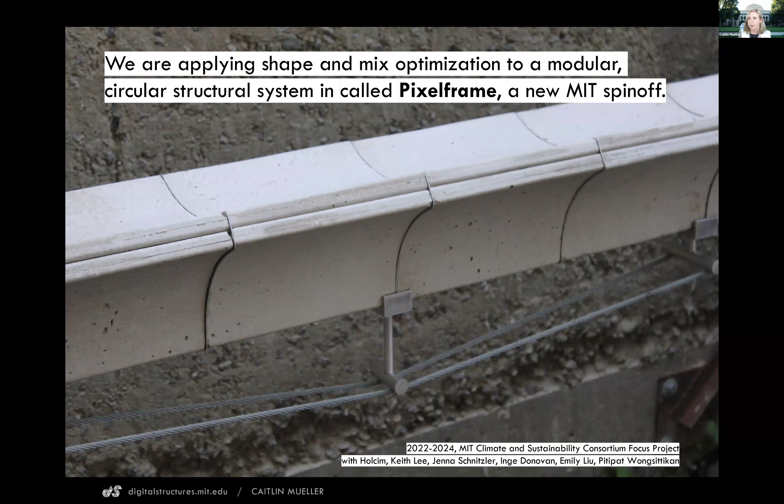The final project I'll show very briefly connects a lot of these ideas together into a product called Pixelframe, which is a precast modular circular concrete system that uses substantially less upfront carbon through intelligent shaping and is also fully circular and reconfigurable thanks to its modular design and a demountable post-tensioning system.

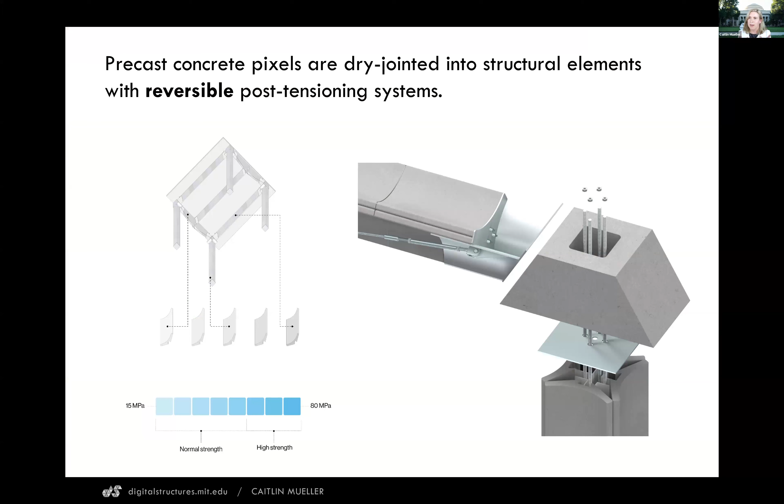The idea is there's one unit, the pixel, that's repeated in many different ways. Pixels can come in different strengths so that we're only allocating carbon and high cement content where it's necessary. And the pixels assemble to become beams, columns, and frames for buildings. The pixels themselves can be reused many times. The metal components can be recycled.

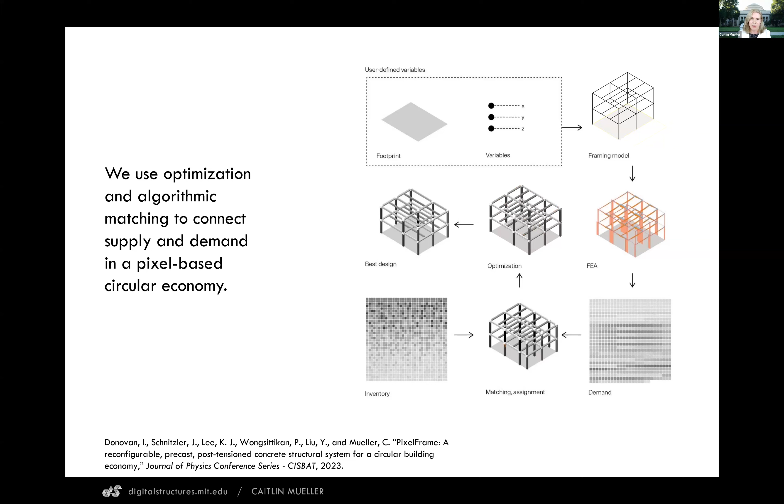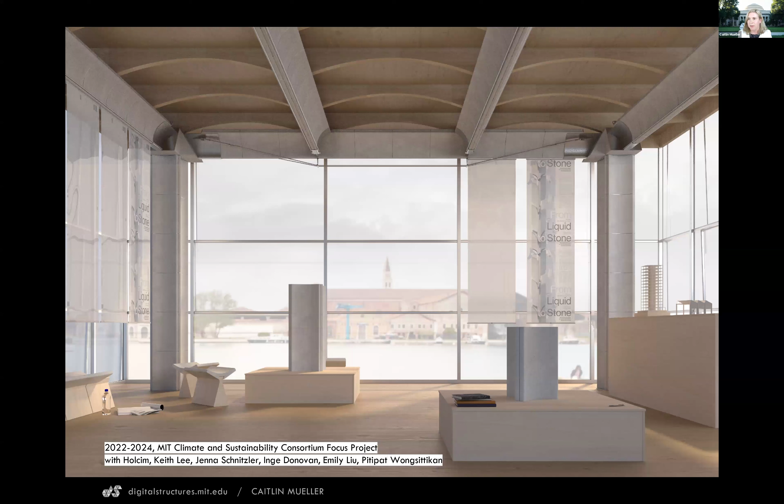We use an optimization technique to automatically design these systems with a fixed inventory so that an architect or a structural engineer designs the massing and the rest happens in an automated way so that we can start to circulate pixels across many different frame types, many different types of buildings, from industrial warehouses to high-end cultural spaces to adaptive reuse commercial buildings and offices.